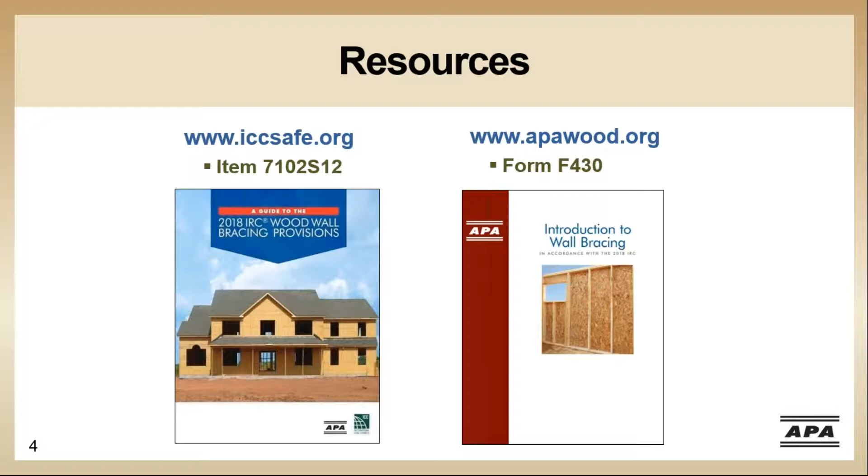During this webinar series, we're working from left to right through the topics shown on these tabs. Last week in our first series, Matt covered the horizontal forces acting on a house and how they are resisted. The code prescribed limitations to prescriptive wall bracing and introduced braced wall lines. Today, we will begin with braced wall panels and go through the steps to determine the required length of bracing. Next week, in part 3, Warren will work through some examples using what we learned in parts 1 and 2, and then review the IRC simplified wall bracing, APA simplified wall bracing, and introduce our wall bracing calculator.

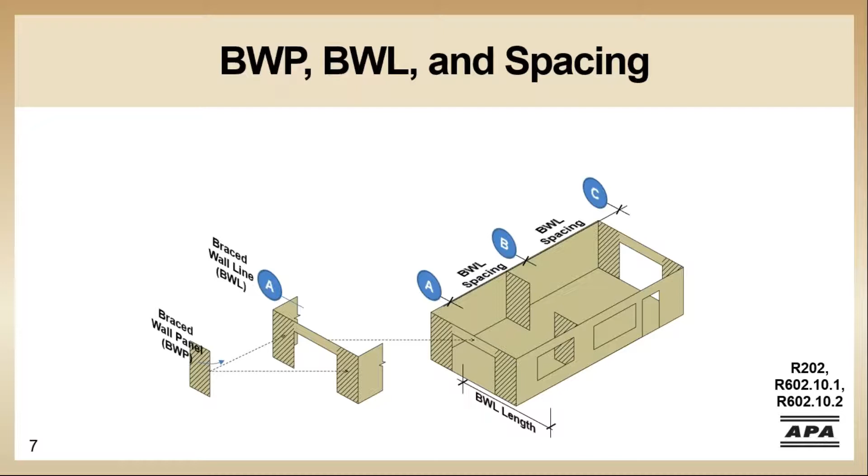The code defines a braced wall panel, or BWP, as a full height section of a braced wall line, or BWL, with no vertical or horizontal offsets. Brace wall panels can be spaced a maximum of 20 feet apart when measured edge to edge. As mentioned earlier, the BWP is the lateral resisting element of a braced wall line. As Matt mentioned last week, the IRC defines a braced wall line as a series of braced wall panels in a single story.

The first one is method LIB, or let-in bracing. It's a diagonal brace that is required to extend from the bottom plate to the top plate. The code defines the rectangular area surrounding the brace as a BWP. The length of this type of BWP depends on the height of the wall and the angle of the brace. Code states that the angle is to be 45 to 60 degrees from horizontal, and the diagonal member can be a 1x4 board or an approved metal strap.

In seismic categories, let-in bracing is permitted in the following cases: the top 2 stories in seismic design categories A, B, and C for 1 and 2 family dwellings, and in townhomes in seismic design category C only on the single story or top level in a 2 or 3 story dwelling. It is not permitted in categories D0 through D2.

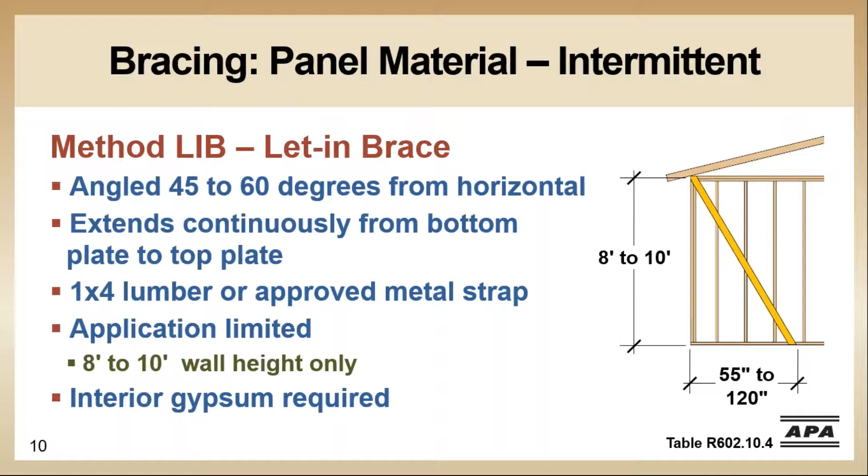Here's an example of method let-in bracing. Code specifies that the diagonal brace must be installed at a 45 to 60 degree angle, and it must be continuous from the bottom plate to the top plate. The interior of the panel has to have gypsum or wood structural panel, which is not shown for clarity. No openings may be cut through the diagonal member, and no openings may interrupt the rectangle made by circumscribing a rectangle around the diagonal brace.

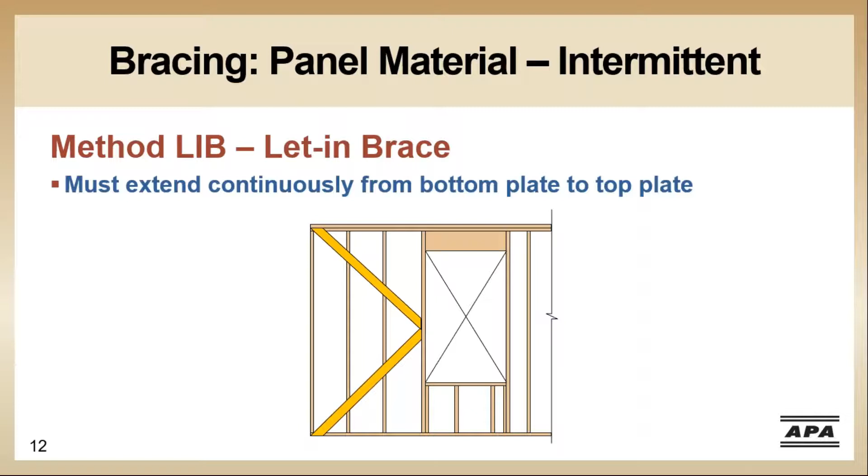For example, the studs at the end of the diagonal brace may not be cut. But potentially a small window fully within the circumscribed rectangle will not interfere with the action of the braced wall panel. Since a diagonal brace is required to be continuous from the bottom plate to the top plate, it cannot be installed as shown here. This type of installation results in a discontinuity.

Method DWB, or diagonal wood boards, is a very strong system. It's even better than wood structural panels, but it is labor and material intensive, and a lot more fasteners are required. This is an example of diagonal wood boards.

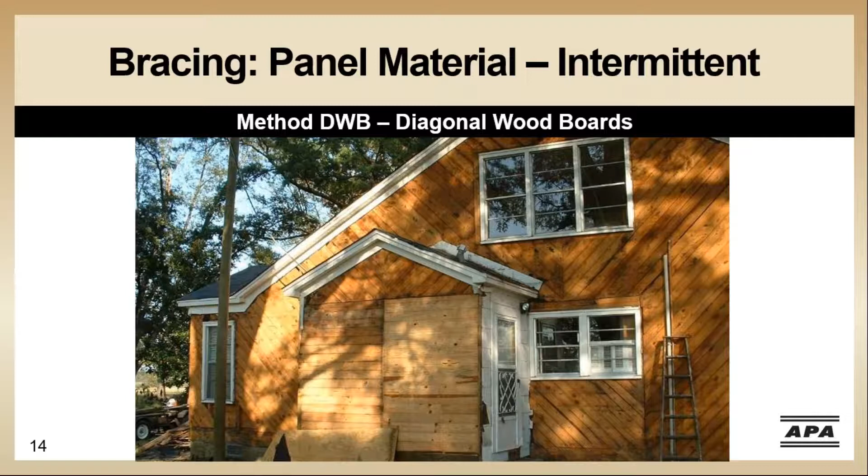These sheathing boards were exposed during a renovation project. If you note on the lower left-hand corner, they shifted to horizontal board sheathing, which is a very poor substitute for bracing because it's only 1/6 as strong. Horizontal sheathing with boards is no longer permitted in the IRC, but there are design values in the American Wood Council's reference SDPWS, or Special Design Provisions for Wind and Seismic.

Method wood structural panel is a wood structural panel that is 48 inches wide. Section R604 gives the definition of a wood structural panel as plywood or OSB conforming to Product Standard 1 or Product Standard 2. Based on wind speed, exposure category, and stud spacing, the minimum thickness may be 7/16 of an inch, and nailing may be an 8-penny minimum.

Blocking is required at all horizontal edges of BWPs. No blocking is required on infill sheathing, which is not considered a BWP. In this picture of tornado damage, you can see that the garage bottom plate is still in place with stud nails sticking up at 16 inches on center. Note the narrow strip of OSB wall sheathing still attached to the bottom plate. Continuity of the wall could have been greatly enhanced had the OSB wall sheathing been better attached to the framing by blocking at the horizontal edges.

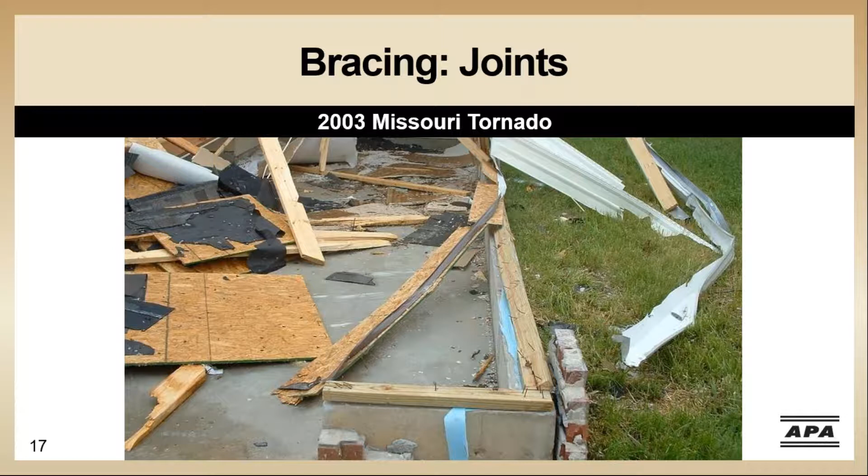Method SFB is structural fiberboard sheathing. Code states that the minimum thickness is 1/2 inch and it must be installed on stud spacing not greater than 16 inches on center. Minimum fastener spacing is 3 inches on center along the edges and 6 inches on center over intermediate supports. The nailing was increased to match other panel type products' shear capacity or lateral resistance.

Here's an example of method SFB, structural fiberboard. The panels are required to be 48 inches in length unless you use the partial credit table in R602.10.5.2.

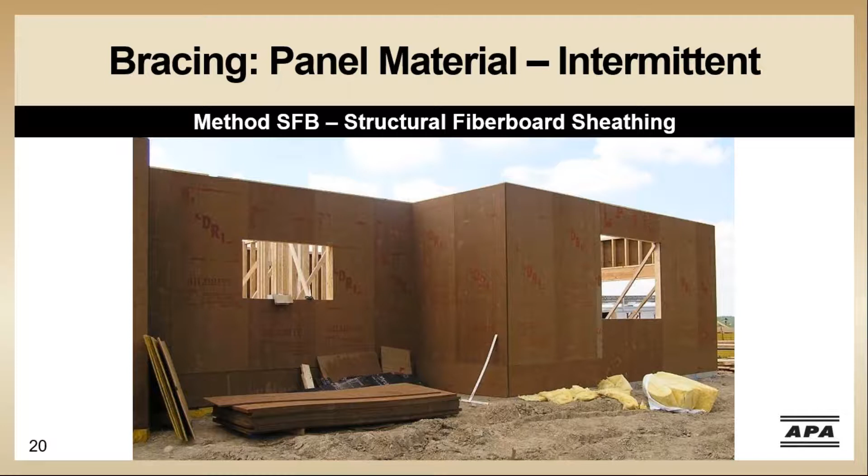Method GB is gypsum board. When gypsum is installed on one side of the wall, the minimum brace wall panel length is 96 inches. If it is installed on both sides of the wall, the minimum length is 48 inches. Minimum thickness is 1/2 inch and maximum stud spacing is 24 inches on center.

Floating corners are not allowed. A floating corner occurs when the edge of the gypsum board is not fully supported by a framing member, like when drywall clips are being used.

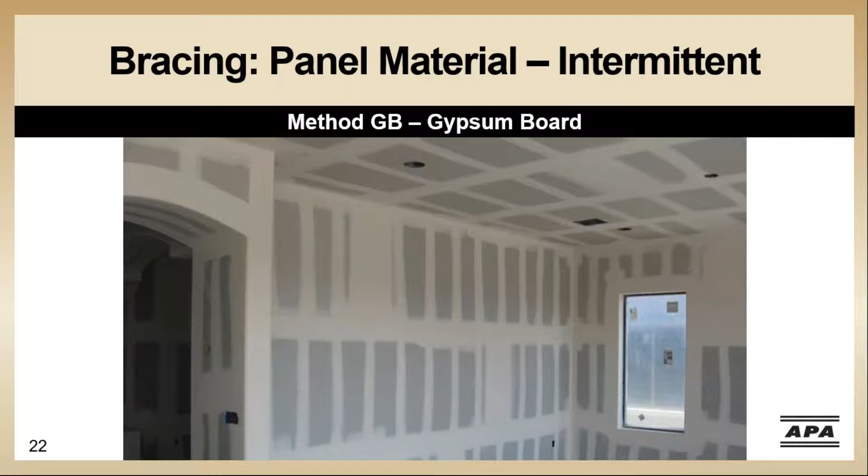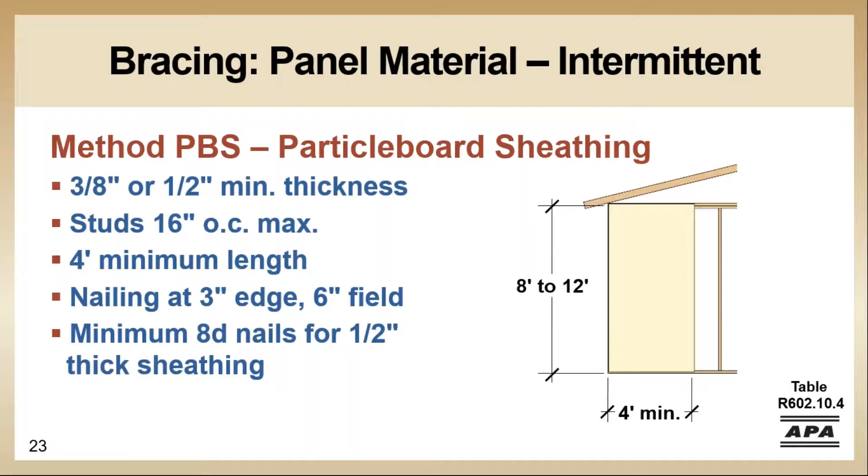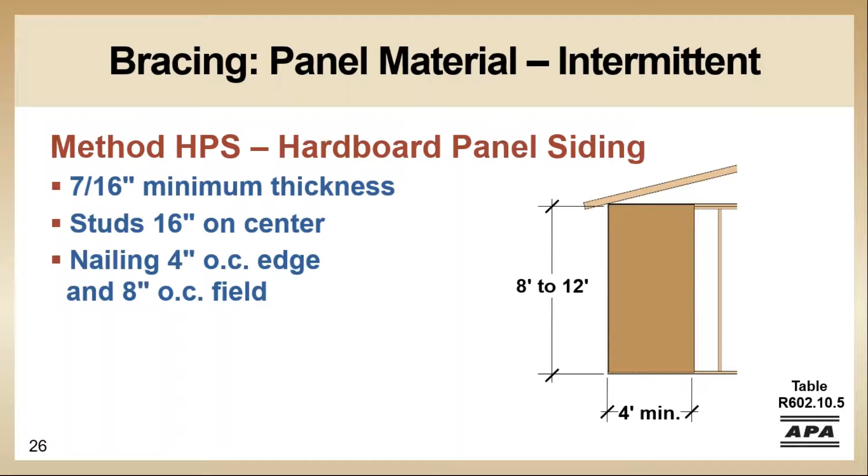This method, HPS, is hardboard panel siding. Fastener spacing is 4 inches on center around the edges and 8 inches on center over the intermediate supports, and the studs are spaced at 16 on center max. The nailing is also increased to match other panel types' shear capacity.

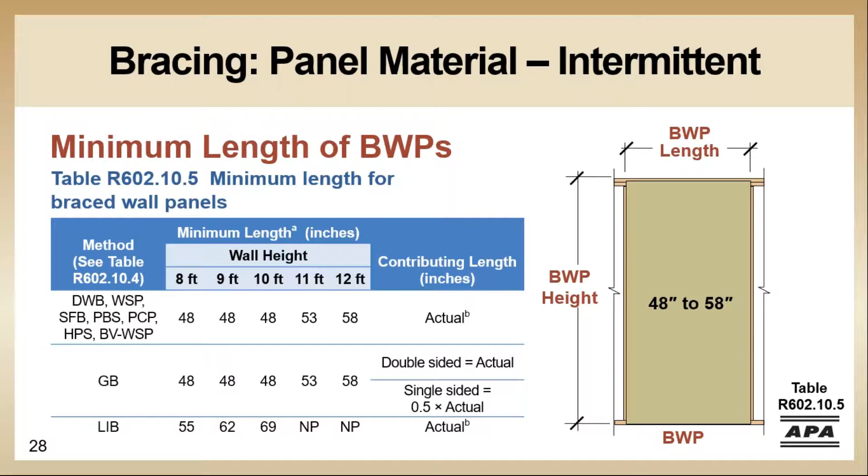BWPs having a length less than 48 inches will now be permitted in intermittent bracing. However, their effective length will be reduced, and it applies to DWB, WSP, SFB, PBS, PCP, and HPS only.

The next 3 intermittent methods can be used when a BWP is less than 48 inches. The first is method ABW, alternate braced wall. This method allows you to have a braced wall panel that is less than 48 inches, but counts 48 inches toward the bracing requirements. They can only be used in 1-story dwellings or the first of 2 stories. This method has been in the code since the 1994 UBC.

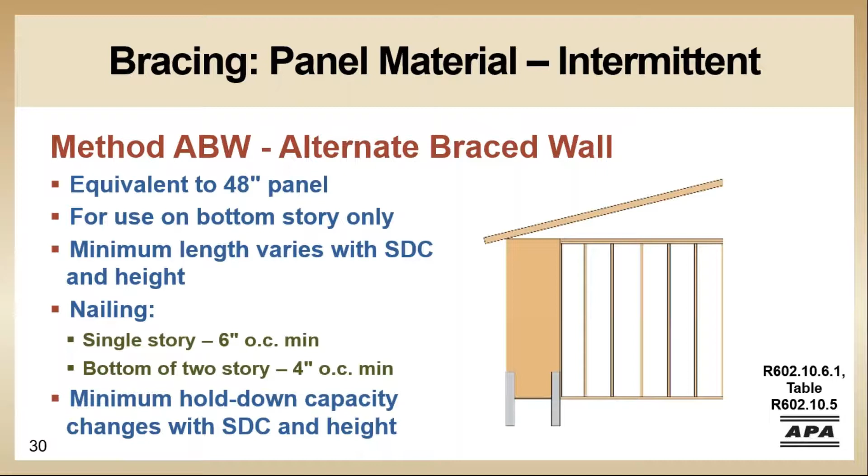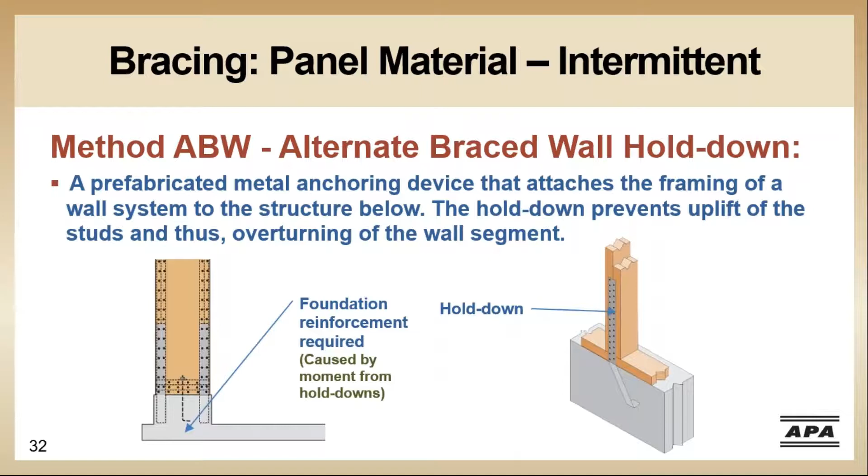ABWs require hold downs. Either the strap type or bolted down hold down are approved for use. Construction of this BWP requires 3/8 inch minimum performance category wood structural panel, which is either plywood or OSB. The capacity of the hold downs are given in IRC table R602.10.6.1. The hold down capacity is a function of the panel length. If the ABW is supporting a story above, it must be nailed at 4 inches on center maximum.

And now we get to portal frames, my favorite subject. Luckily for me, we have an on-demand webinar where the details are covered more in depth. It's Portal Frames Built Right and is available on our website, apawood.org. So I will just be touching on the basics of these methods.

This first method is PFH, or portal frames with hold downs. PFH requires an extended header. This method can be as narrow as 16 inches for a one-story, but must be 24 inches if the BWP supports a story above. Method PFH braced wall panels are permitted to replace each 4 foot of braced wall panels.

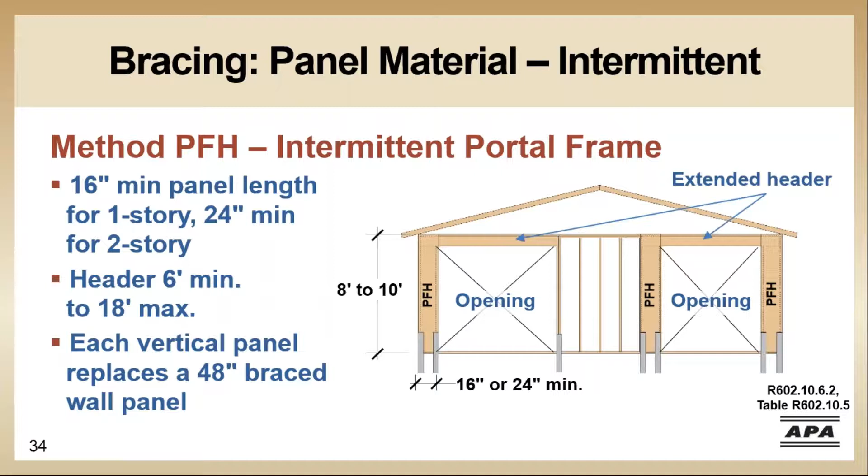PFH must be constructed from plywood or OSB. The required hold down capacity is 3,500 pounds for both the 16-inch and 24-inch construction. The 1,000-pound strap is applied to the opposite side from the sheathing. Notice the extended header and the grid nailing at 3 inches on center. This is a moment resisting connection that allows the BWP to be narrow. The 3-inch on center nailing is required at the double stud on each side and at the bottom plates.

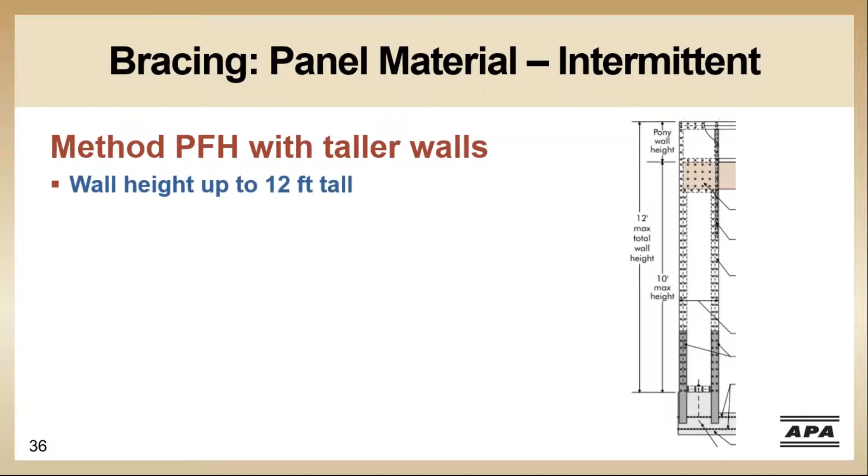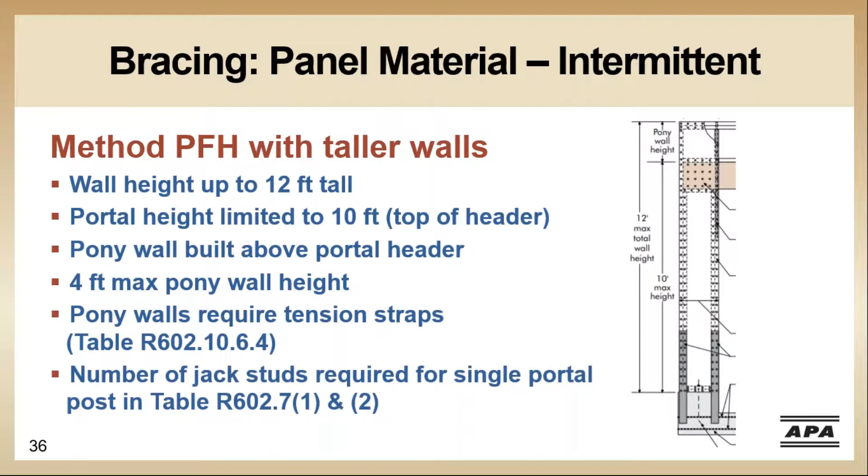In taller walls using PFH, the wall height can be up to 12 feet tall. The portal height is limited to 10 foot to the top of the header. A pony wall can be built above the portal header, but the maximum pony wall height is 4 feet. They also require tension straps per table R602.10.6.4. The number of jack studs required for a single portal post is found in tables R602.7, parentheses 1 and parentheses 2.

PFH can be built as a single portal or a double portal. When built as a double portal, there's a BWP at both ends of the header. In this case, each BWP is equivalent to 4 feet of bracing.

A 1,000-pound strap is required between the jack studs and the header to resist hinging when a load is applied perpendicular to the wall. In the case of a single portal, a 1,000-pound strap is required connecting the foundation and the jack studs supporting the other end of the header.

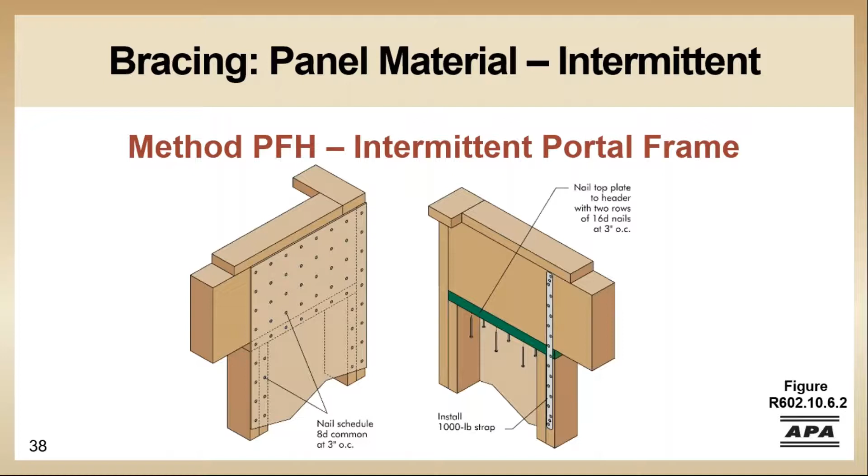Notice the top plate is nailed into the header with 16 penny nails. As mentioned earlier, all these details are covered more in depth in APA's on-demand webinar, Portal Frames Built Right.

The next method is portal frames at garage, or PFG. It also requires an extended header and can be as narrow as 24 inches.

PFG must be constructed from 7/16 inch plywood or OSB. Note the extended header and the grid nailing at 3 inches on center. Also notice the 2 anchor bolts and no hold downs. The 3-inch on center nailing is required at the exterior studs only, and only 1 bottom plate is required.

This portal configuration is worth 1.5 times its actual length. So a 32-inch long portal is equivalent to a 48-inch braced panel.

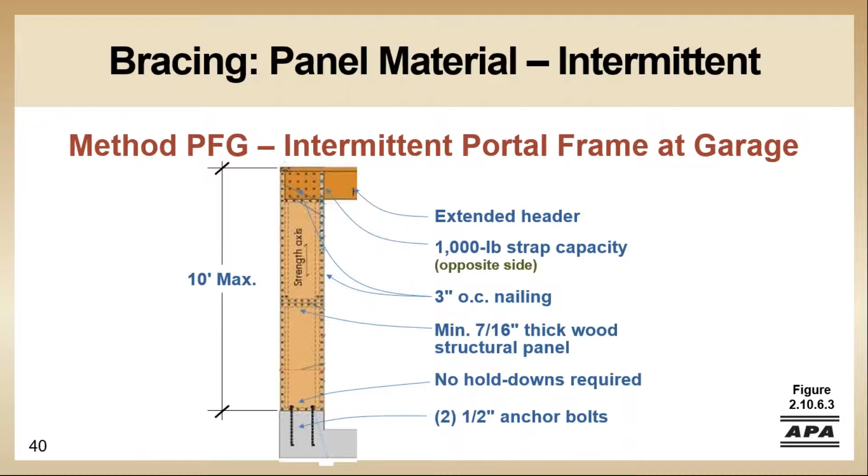Reference table R602.10.6.4 for the required tension strap strength. A 1,000-pound strap works for walls that do not have a pony wall above the opening.

In method PFG with taller walls, wall height can be up to 12 feet. The portal frame height is limited to 10 feet, measured to the top of the header. A pony wall can be built above the portal header, 4 foot being the maximum height allowed.

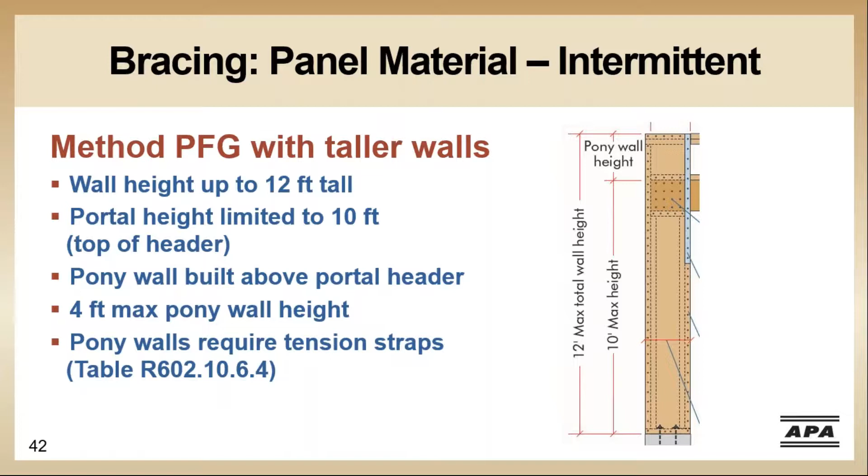They require tension straps per table R602.10.6.4, and the number of jack studs required for a single portal post is specified in table R602.7(1).

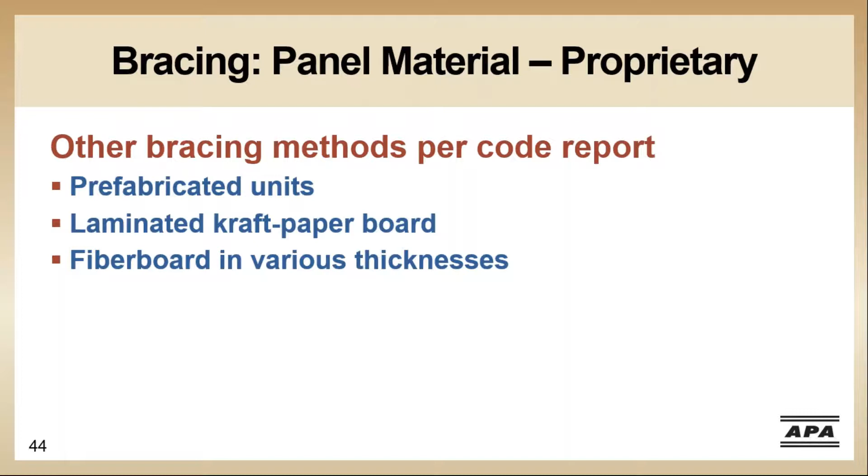Other products can be used as braced wall panels if they have a code report. The code report defines how the product must be installed to qualify as a code-compliant braced wall panel. These are examples of proprietary systems that may be used with the proper documentation and installation.

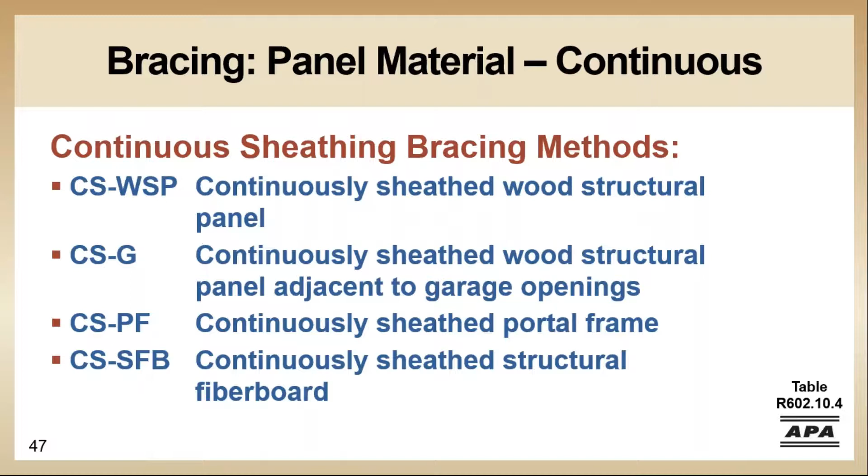Now we'll talk about the 4 continuous sheathing methods. For all 4 methods, the braced wall lines must be fully sheathed, including the gable ends.

Continuous methods allow for narrow BWPs without hold downs and must be fully sheathed with wood structural panels or structural fiberboard sheathing.

The sheathing requirements for continuous methods are: all full height areas are to be sheathed. The areas above and below openings must also be sheathed.

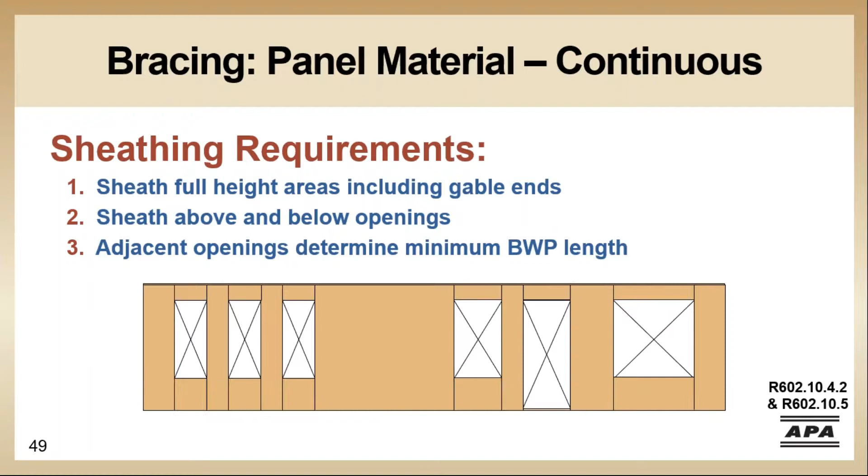Some of the full height areas may qualify as braced wall panels, and the openings in the wall determine how wide the BWPs have to be.

The sheathing above and below openings, and the sheathing that is too narrow to be a BWP, make connections between the BWPs in the wall line. These connections make the wall behave like a long wall line, therefore allowing the BWPs to be narrower than 4 feet. This concept will be explained in the slides that follow.

The opening height is measured from the top of the opening to the bottom of the opening. It is not measured from the top of the opening to the bottom of the wall.

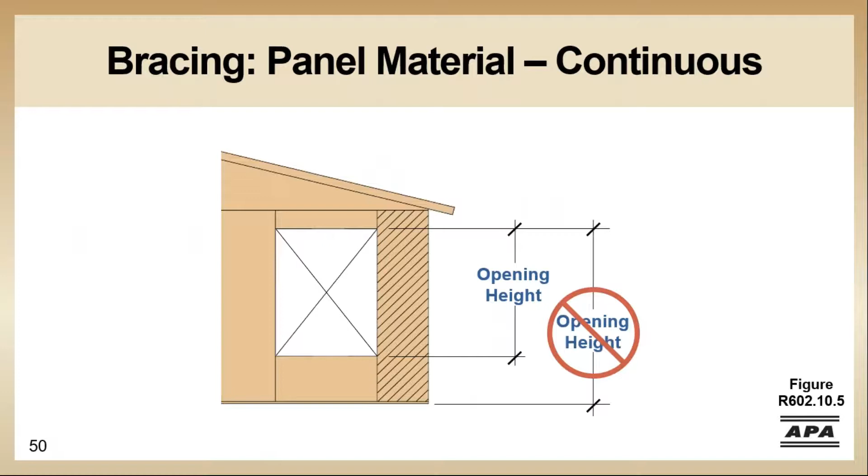Blocking is required at all horizontal edges of BWPs. The infill panels do not need blocking.

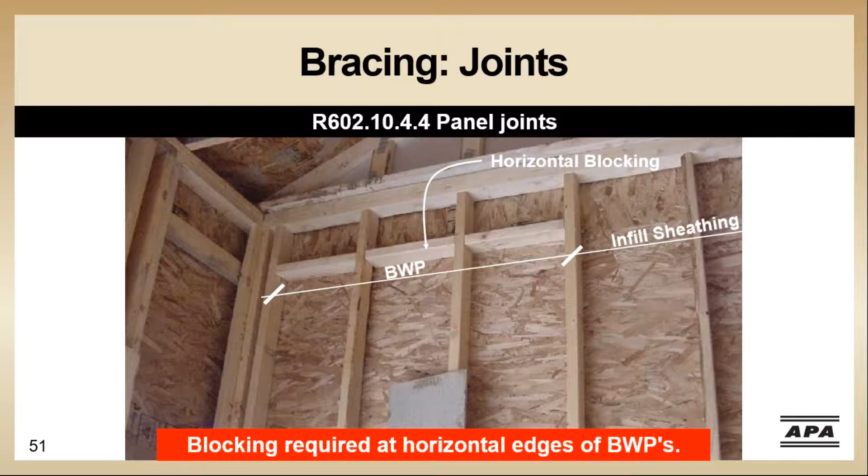For continuous sheathing methods, the entire building must be sheathed, including gable ends. However, not every sheathed area has to meet the length requirement of the BWP.

The wall line only has to have enough BWPs to meet the placement and length requirements of Table R602.10.3, parentheses 1 through 4.

The opening in the wall line determines how wide the BWP has to be. If a section of bracing has openings on either side, the taller opening determines the minimum bracing length.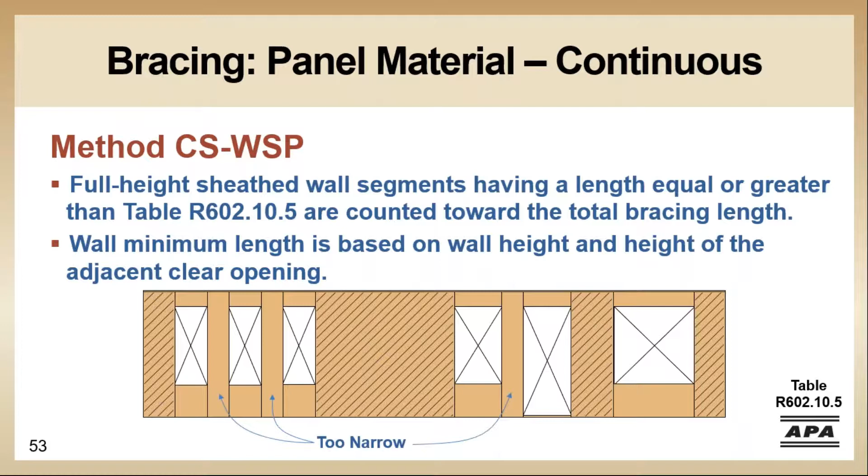Using IRC Table R602-10-5 with the adjacent clear opening height and the wall height, you can determine the minimum length of braced wall panels that can count toward the required bracing.

The table continues with opening heights up to 12 feet, as well as CSG and CSPF, which we'll talk about in a minute. Note that for these two methods, the max header height is 10 feet with a wall height up to 12 feet if a pony wall is used.

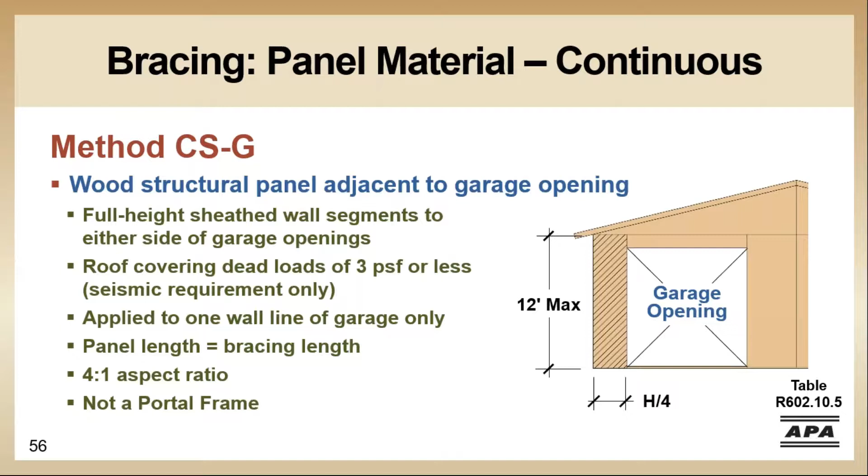This is method CSG, or continuously sheathed garage. It can only be applied to one garage line. It can be applied to both sides of the garage opening, and a wall can have up to 4 openings. This is not a portal frame. It is a regular framed wall with a header. It's a special case of the CSWSP, and it does come with limitations.

For a continuously sheathed home, the walls on either side of garage openings are permitted to have an aspect ratio of 4:1. For an 8-foot wall, the brace may be as narrow as 24 inches. A 9-foot tall garage return wall would have to be at least 27 inches wide.

It is not necessary to have an extended header over these narrow walls beside the garage opening, but a header must be placed next to the panel on jack studs. See footnote C in Table R602-10-4 for more information.

This provision is limited to a single story with a light roof covering for seismic requirements only. In lower seismic regions, there is no roof weight limit, per footnote B in Table R602-10-4. This is because the weight of the roof has no negative impact on wind loads. In fact, the additional weight helps increase the uplift resistance.

What if we have a story above the garage or we have a tile roof? CSPF makes use of the extended header BWP that we discussed earlier, but without hold downs and with continuous sheathing. Furthermore, similar to PFH, CSPF may be used throughout the structure, including on raised floors.

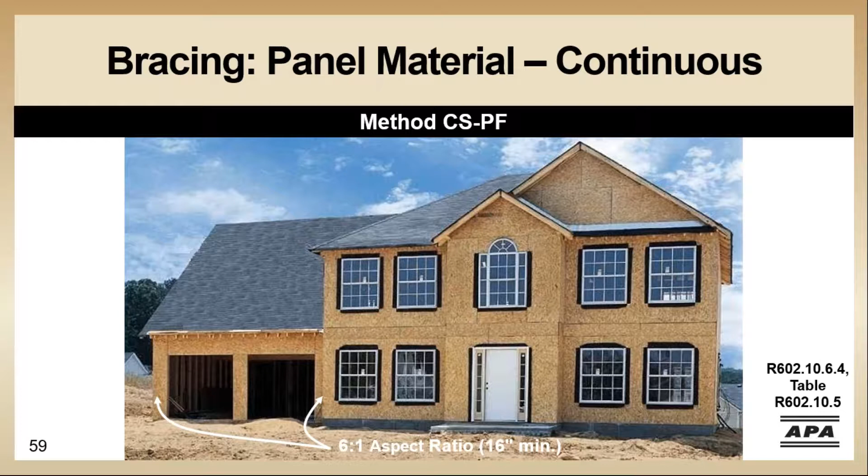And the minimum length of the panel is found in Table R602-10-5. I just want to take a moment here to mention that the panel splice location is one of the most common mistakes I've seen with these type of installations. It's important that it be close to the mid-height of the wall.

Table R602-10-6-4 gives you the required strap capacity based on stud framing, pony wall height, and opening width. When you see DR, it means it's outside the scope of prescriptive design and must be reviewed by a design professional.

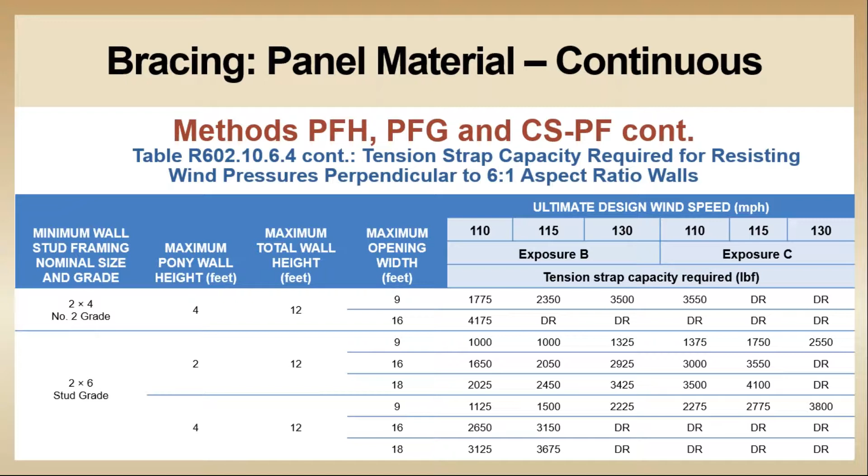The garage on the left could be built using CSG on the front walls that have a 4:1 aspect ratio, or 24 inches for an 8-foot wall height. Again, these BWPs are not permitted to support a story above. If the BWPs have less than a 4:1 aspect ratio, CSPF has to be used.

The tucked-in garage must be built using CSPF because the story above is being supported by the braced wall panels. Note that the wall that has the CSPF in it must meet both the length and placement requirements for that braced wall line.

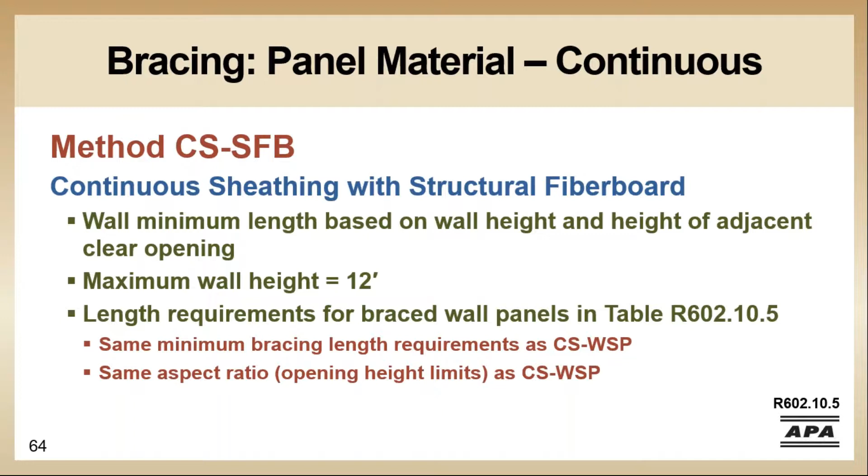The last continuous method is continuously sheathed structural fiberboard. The minimum length requirements are based on opening heights adjacent to the panels and are the same as what we covered for CSWSP. All continuously sheathed braced wall lines must have one of these 5 end conditions shown.

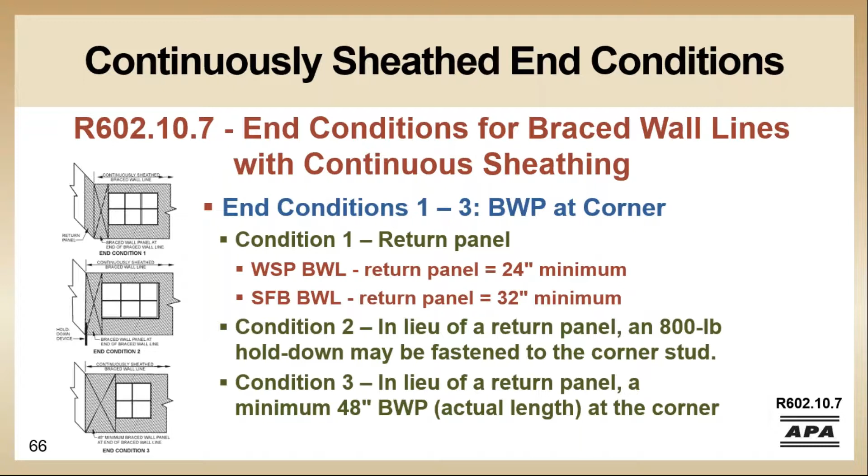For these end conditions, the return panel requirement in condition 1 in a wood structural braced wall line: the return panel must be 24 inches minimum, and in a structural fiberboard braced wall line, the return panel must be 32 inches minimum. In condition 2, in lieu of a return panel, an 800-pound hold down may be fastened at the corner stud. In condition 3, if you have a full-length 48-inch braced wall panel at the corner, no corner return is required.

For condition 4, in the wood structural panel braced wall line, the sheathed corner panel D must be 24 inches minimum, and its return panel must also be 24-inch minimum. For the structural fiberboard braced wall line, the corner panel D must be 32 inches minimum, and its return panel also must be 32 inches.

In condition 5, in lieu of a corner panel, an 800-pound hold down may be fastened to the end of the BWP closest to the corner. Note that these 800-pound hold downs often travel in pairs. If 2 continuously sheathed wall lines meet at a corner and one does not have a panel at the corner, both walls lose the restraint at that corner and each may need an 800-pound hold down.

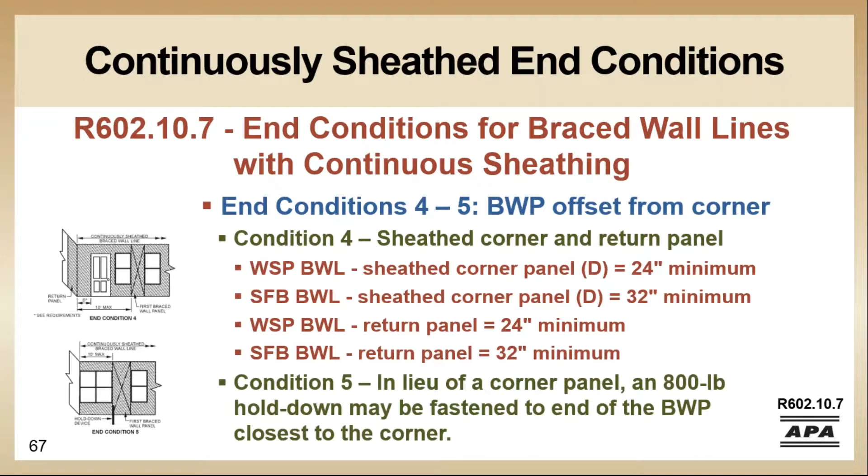Now we are able to mix methods with certain rules. Code permits a variation in bracing methods between stories. The IRC also permits a variation in bracing methods between braced wall lines of the same story. This includes continuous sheathing. This means that the entire structure will not have to be fully sheathed. In the higher seismic design categories, the entire story will have to be fully sheathed, but not the entire structure.

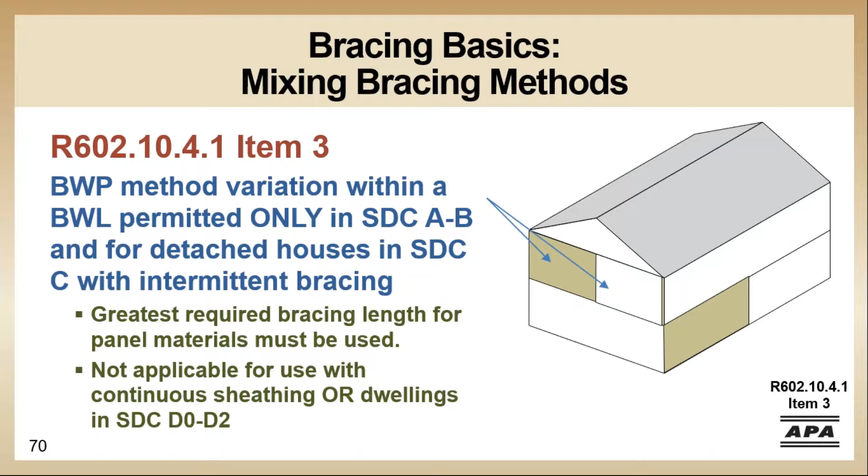In Table R602.10.4.1, Item 3: the braced wall panel method variation within a braced wall line is permitted only in seismic design categories A and B, and for detached homes in category C with intermittent bracing. The greatest required bracing length for panel materials must be used, and it is not applicable for use with continuous sheathing or dwellings in seismic design category D0 through D2.

Item 4 states that mixing CSWSP, CSG, and CSPF along a braced wall line is permitted in any seismic design category.

Item 5 states that the braced wall panel method variation in a braced wall line with continuous sheathing on exterior walls and intermittent on interior walls is permitted only in seismic design categories A and B, and for detached houses in seismic design category C. The greatest required bracing length for all panel materials in a braced wall line must be used. Once again, this is not applicable for dwellings in seismic design categories D0 through 2.

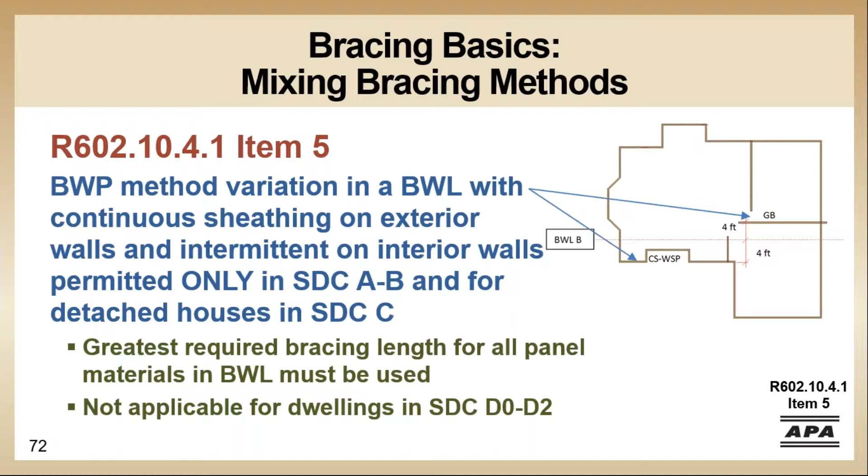For intermittent bracing methods, there are 3 placement requirements that are useful to memorize. The BWP is to begin no more than 10 feet from the end of a braced wall line. The braced wall panels must be located not more than 20 feet on center from edge to edge. A minimum of 2 BWPs per braced wall line when the braced wall line is greater than 16 feet, and a minimum of 1 48-inch braced wall panel or 2 reduced length panels if the braced wall line is less than 16 feet.

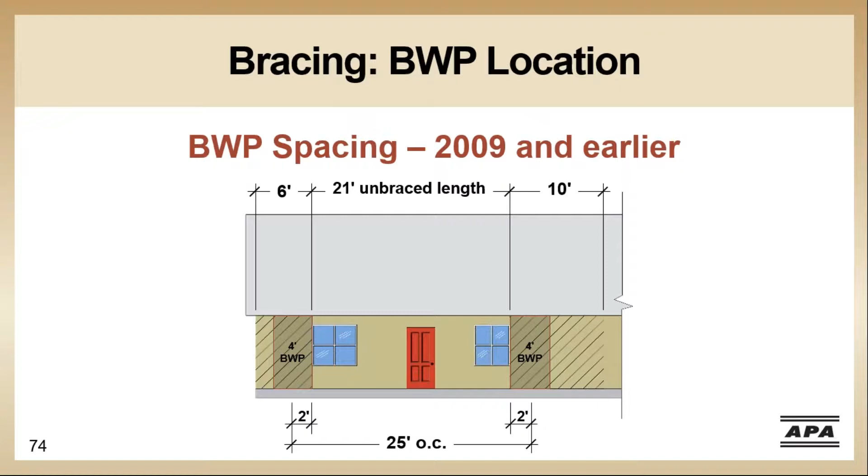Here we have BWPs that are 6 and 10 feet wide. For the 2009 and earlier codes, ICC interpretation measured from the center of an assumed 4-foot BWP, which made the unbraced length 21 feet. The code itself never stated how far into the panel that center measurement was to be done. Therefore, larger panels could require a smaller unbraced distance between them. It didn't make any sense, so with the 2012 IRC, braced wall panels now may be spaced up to 20 feet apart, edge to edge, period. No other measurements are required. The new provision more clearly represents the intent of the code and the principle of spreading out the resistance along the line of force.

BWPs may be located 10 feet away from the end of the braced wall line when using wind requirements only.

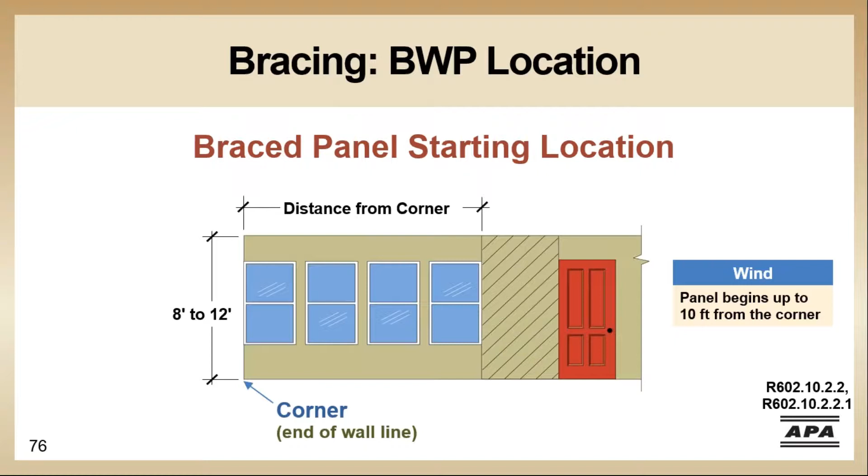And we'll look at one last one. Does this meet the code with an 8-foot high ceiling wall height? The widest BWP spacing is 16 feet. One braced wall panel is 12 feet from the end of the braced wall line, and the braced wall panels meet the minimum width requirement. So no, this one does not meet the requirements because the braced wall panels are more than 10 feet from the end of the wall.

Does this meet the IRC code provision? The widest braced wall panel spacing is 16 feet. One braced wall panel is 12 feet from the end of the braced wall line. The braced wall panels meet the minimum width requirement. Oh, excuse me, so it did not meet the end of the wall.

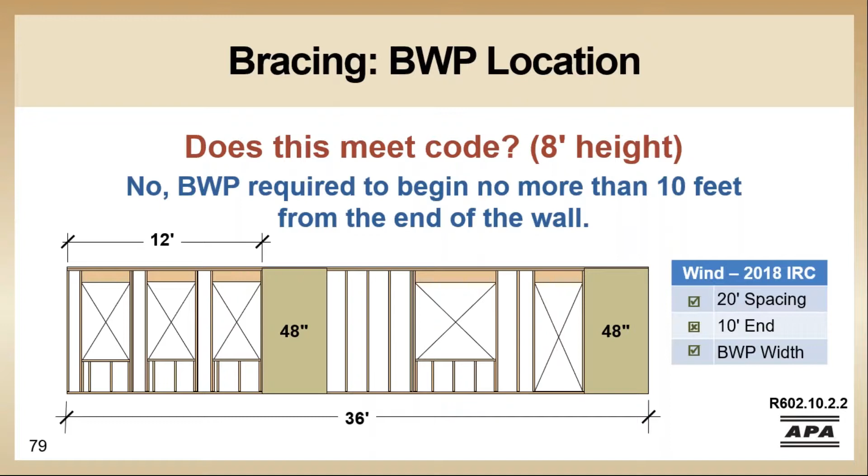Now we get to the last part of the presentation: required lengths of bracing. When determining the required length of bracing, wind speed must be taken into consideration, and depending on the location of the house, seismic risk must also be considered.

We will now go over how to determine the required length for wind and seismic. If you're in an area where seismic considerations must be considered, the required lengths for both wind and seismic must be determined, with the larger length controlling. Other construction details such as hold-downs must be applied regardless of which requirement controls.

There are two bracing length tables, one for wind and one for seismic. The required bracing length is the maximum of the two tables' bracing lengths times all the adjustment factors, which we will go over next.

We'll do wind first. So we determine the required length of bracing by locating the correct row and column using the wind speed, story location, braced wall line spacing, and bracing method.

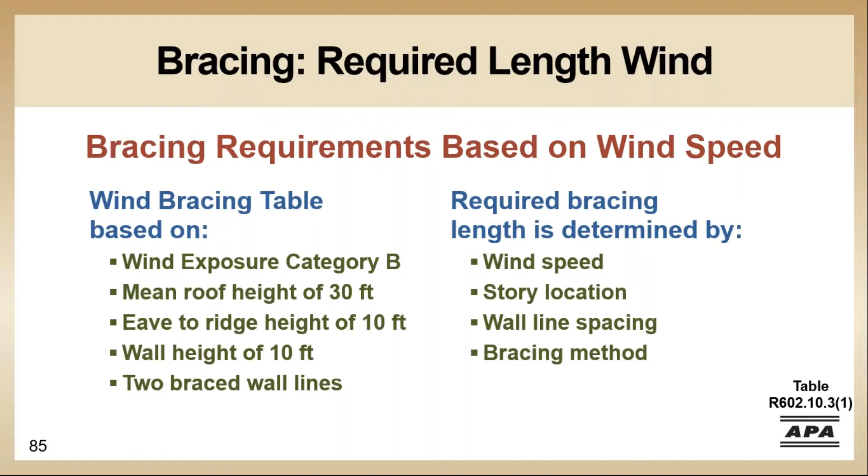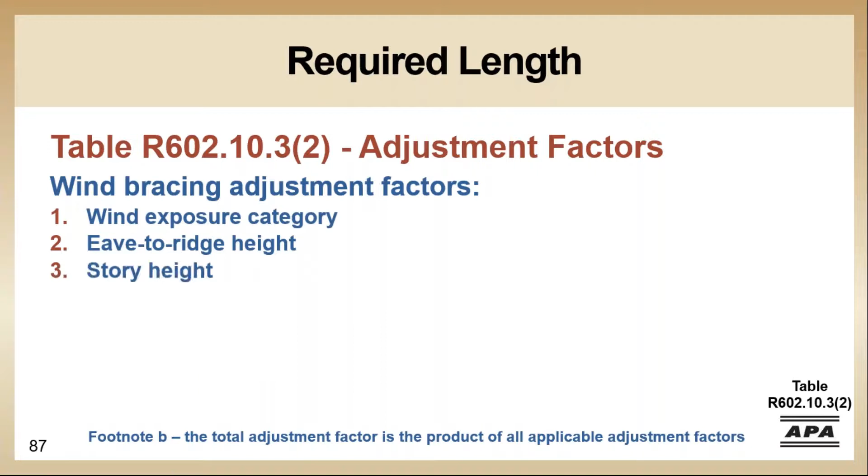The wind bracing adjustment factors are: wind exposure category, eave to ridge height, story height, number of braced wall lines, hold-downs on the top story, interior gypsum board finish, gypsum board fastening, and horizontal blocking. The total adjustment factor is the product of these factors which would apply to the braced wall line.

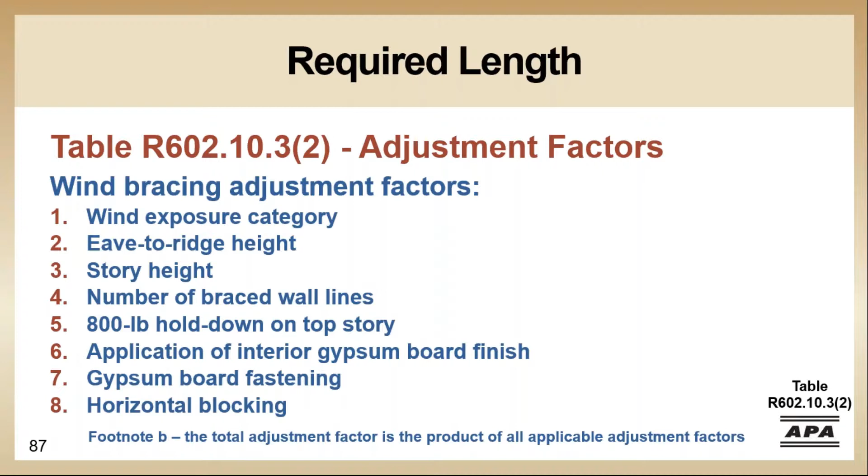The first factor is the exposure category, which Matt covered last week. Note that table R602.10.3(1) is based on exposure category B, so the value here for exposure B is 1.0.

But new to the 2018 IRC, footnote D can change the factor. An example of this is a house on a large body of water. You can't say that the side of the home facing the lake is exposure D and the rest of the home is exposure B and then factor accordingly. Now the entire structure has to be designed as exposure D.

Adjustment factor number 2 is the roof eave to ridge height. When wind blows on a house, the larger the area, the greater the load, like a sail on a boat. The factors go up as the eave to ridge height increases.

If you're wondering why the factors are higher or lower for less than 10 feet on single story versus multi-story, it's because the roof eave to ridge height is a larger percentage of the total area of the house when it's a single story. If you compared the effects of increasing the eave to ridge height from 10 feet to 15 feet on a single story house versus a 3-story house, the percentage of area increased is much greater on the single story.

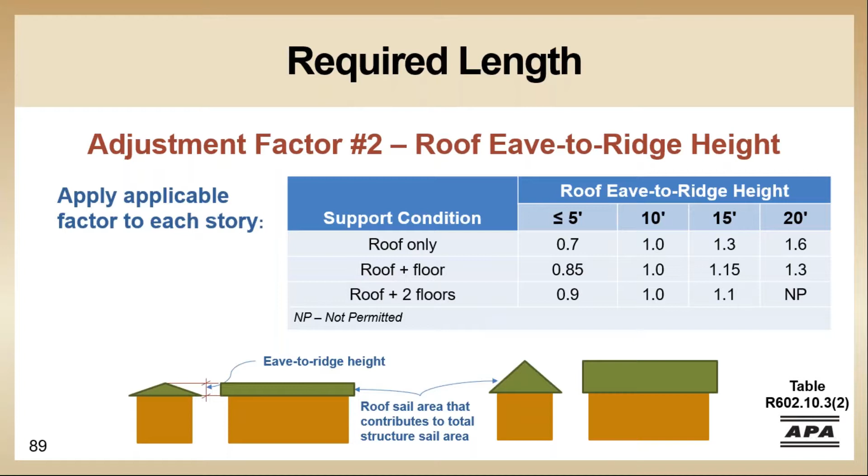Adjustment factor 3 is story height. Table R602.10.3(1) is based on a 10-foot story height, so the adjustment for 10 feet here is 1.0. The 12-foot story height is just for linear interpolation purposes only, since the story height is limited to 11 foot 7 inches.

The 2018 IRC changed terminology from wall height to story height in table R602.10.3(2), but not in (1). That causes a conflict. Story height is defined in section R202 as top of floor to top of floor. Wall height is not defined.

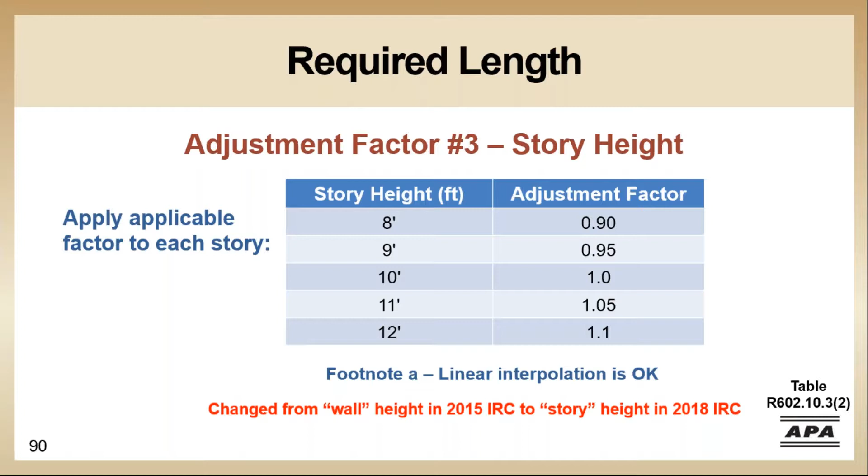Adjustment factor number 4, table R602.10.3(1), is based on 2 braced wall lines, so the adjustment for 2 braced wall lines is 1.0. Note that this applies to each direction at each story. Adjustments are based on the reduced braced wall line spacing resulting from the use of interior braced wall lines.

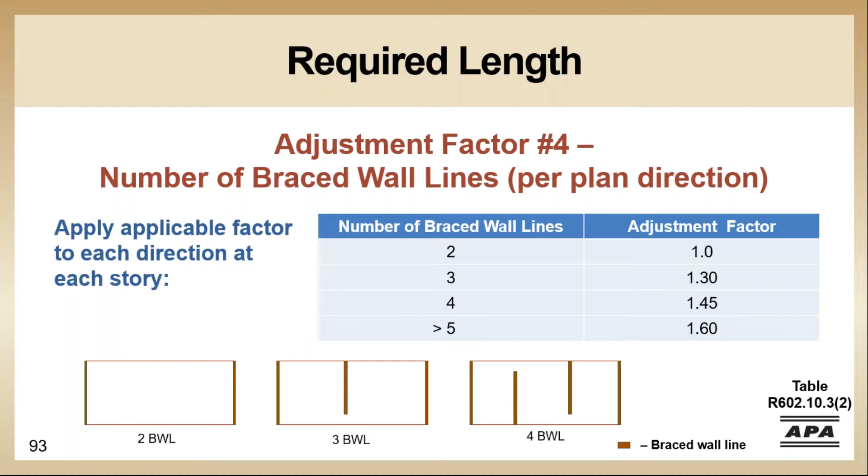Adding more braced wall lines will result in less space between the braced wall lines, which will require less bracing, but then this adjustment factor must be applied. The adjustment is for all parallel lines, not just the interior lines. On occasion, an exterior wall line will require two separate braced wall lines.

Adjustment factor number 5 is applicable with these methods to the top story only, because it does not have the mass of stories above it to help resist the overturning forces due to wind. They're installed at both ends of each braced wall panel, and a continuous load path to the foundation is required.

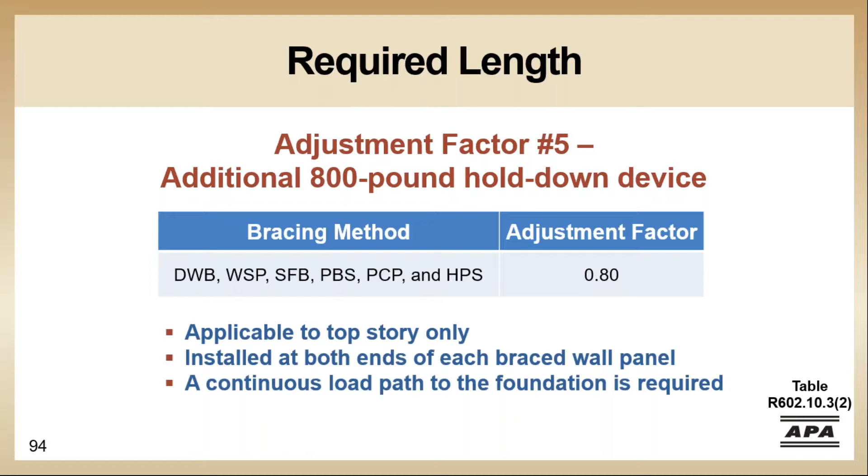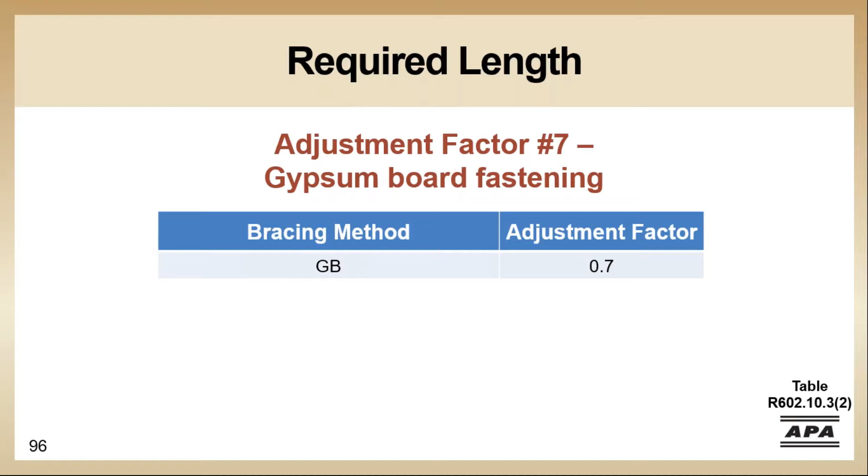Adjustment factor number 7 covers gypsum board fastening. This factor is applicable when panels are fastened at 4 inches on center at the perimeter and all horizontal joints are blocked. We noted earlier that minimum fastener spacing is 7 inches on center with methods GB, so this adjustment credits the use of more fasteners. This only applies to perimeter fasteners; fasteners in the field can remain at 7 inches on center.

Adjustment factor number 8 is a big one in my opinion, in that if horizontal blocking is omitted, you need twice the number of braced wall panels. But this can work on some garages and sidewalls without affecting your design much.

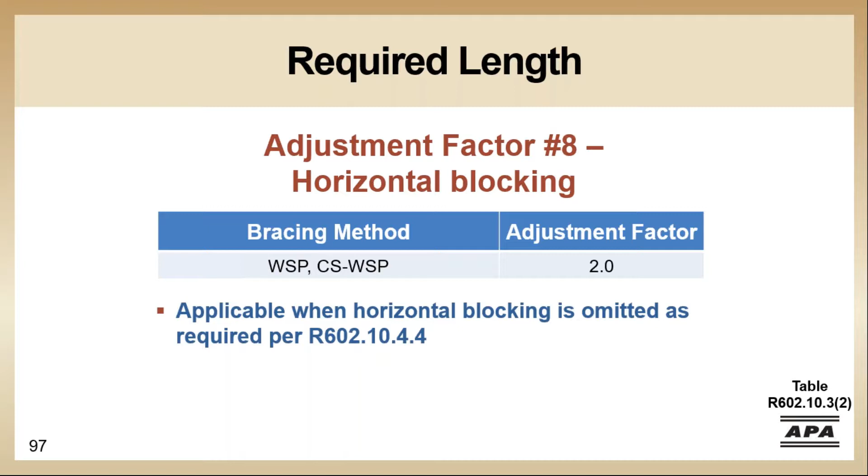In the 2015 IRC, braced wall line spacing only applies to some of the methods, but now in the 2018 IRC, braced wall line spacing requirements apply to all methods.

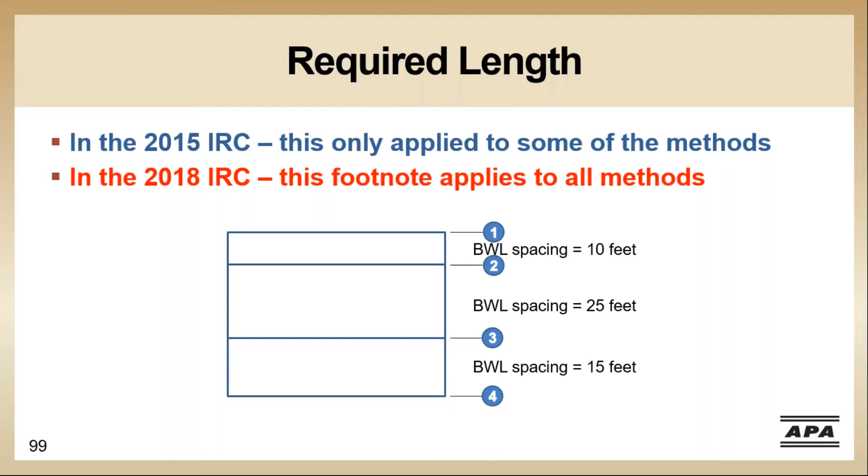In this example, the braced wall line spacing for line 1 is 10 feet. For braced wall line 2, the spacing is the average distance between lines 1 and 3, which is 17.5 feet. For braced wall line 3, spacing is the average between lines 2 and 4, which equals 20 feet. And braced wall line 4 spacing is 15 feet.

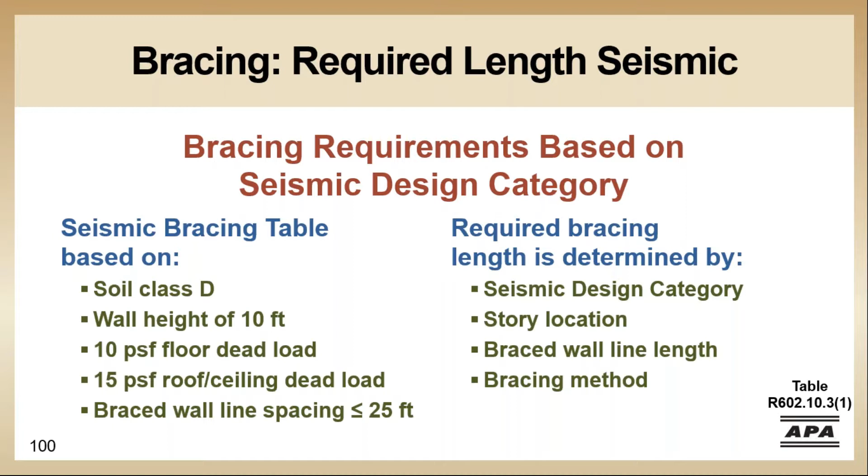So now let's look at the seismic bracing requirements. If the structure is a detached 1 or 2 family dwelling in seismic design category D or greater, or townhomes in seismic design category C or greater, you must also consider the seismic bracing length requirements. You then compare the required length from the wind tables, and the longer length will control.

Determine the required length of bracing by locating the correct row and column using the seismic design category, story location, braced wall line length, and bracing method. One difference you'll notice is you enter the table with the braced wall line length instead of the braced wall line spacing.

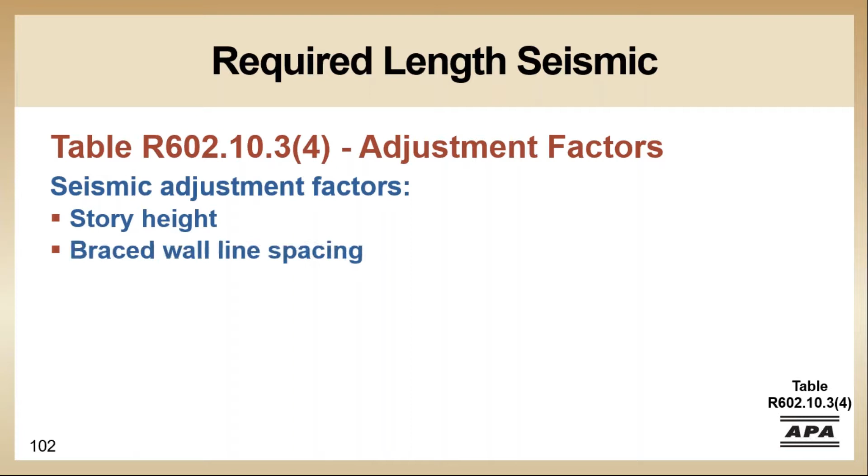As with wind, after you determine the required length of bracing, the next step is to apply the adjustment factors, which are story height, braced wall line spacing, wall dead load, roof ceiling dead loads, walls with stone or masonry veneer, interior gypsum board finish, and horizontal blocking. So all these adjustment factors apply to your seismic designs.

If your story height is 10 feet or less, no adjustment is needed. Over 10 feet, you must multiply by 1.2.

If you're looking at a townhouse in category C and the braced wall line spacing is less than or equal to 35 feet, no adjustment is required. If the braced wall line spacing is greater than 35 feet up to 50 feet, the adjustment factor is 1.43. Remember, if you're in category C, detached 1 and 2 family dwellings are exempt from seismic requirements.

In category D, these adjustment factors apply to both townhomes and single and 2 family dwellings. Braced wall line spacing less than 25 feet requires no adjustments. Over 25 feet but less than or equal to 30 feet is multiplied by 1.2. Over 30 feet but less than or equal to 35 feet is multiplied by 1.4.

The next adjustment factor is the wall dead load. As Matt covered in the first webinar, the seismic load is determined by the mass of the structure. If the wall dead load is between 8 and 15 psf, no adjustment is needed. If the wall dead load is less than 8 pounds per square foot, you're able to take a reduction and can multiply the required length by 0.85.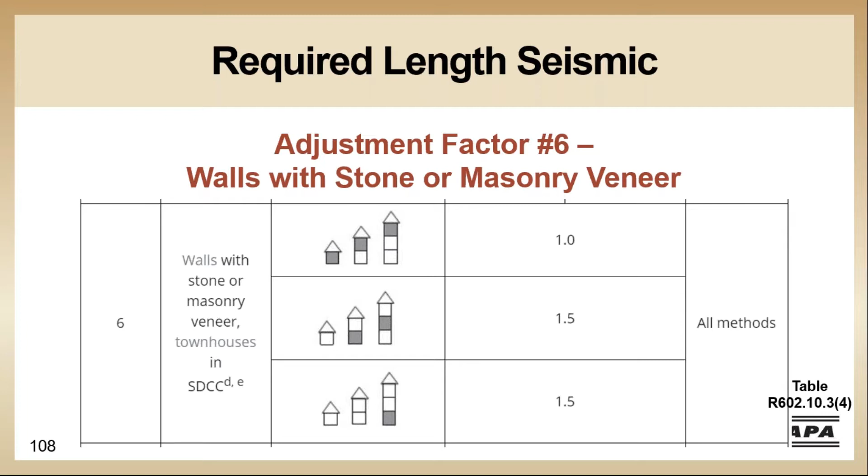Now we'll get into the adjustment factor for method BVWSP, which is wood structural panels with a stone or masonry veneer. This applies to detached 1 and 2 family dwellings in categories D0, 1, and 2. For details on this method, we're referred to Table R602.10.6.5. Note that townhomes with stone or masonry veneers in category D0 through 2 should have their wall bracing designed by an engineer.

Figure R602.10.6.5 gives further detail on how to properly construct the BVWSP method. As you can see, it's complicated. This factor alone is why I'm so thankful I don't have to deal with seismic designs in my territory.

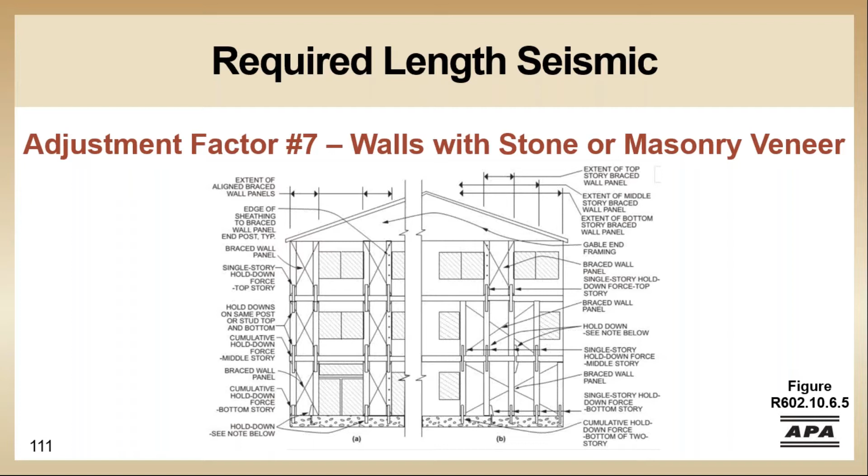The next adjustment factor applies to method WSP and CSWSP used for single family or 2 family dwellings in categories D0 through D2. If you're using these methods and have stone or masonry veneer on the first or second story of a 2-story dwelling, the required length should be multiplied by 1.2.

The last adjustment factor applies to both methods WSP and CSWSP. As with wind factors, if you choose not to block the horizontal joints, you will need to provide twice as much bracing.

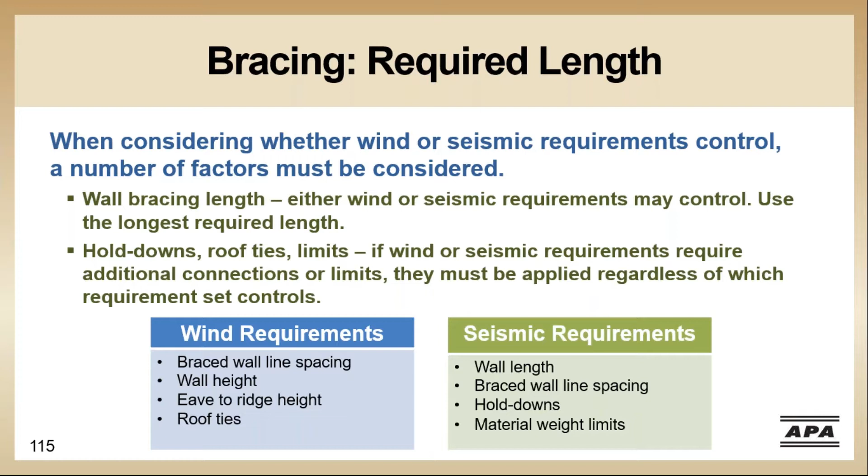If you do happen to be in a higher seismic area, you must calculate the required length for both wind and seismic and adjust that length with the appropriate adjustment factors. After this is completed, you compare the lengths required and the longer length will control. I find this decision tree helpful to think through the process.

Let's take a quick look at an example. The wind table applies to all structures while the seismic table has subcategories that determine how it is applied.

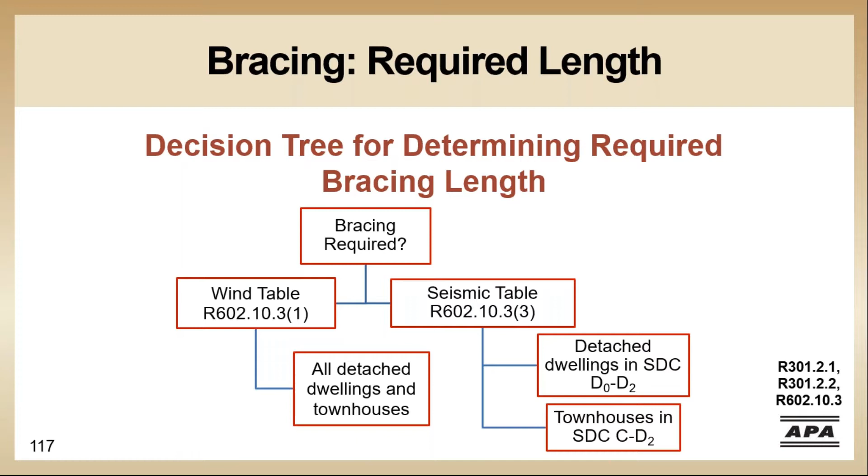First, we go to the wind table. We will assume 110 mile per hour ultimate wind speed, the bottom of a two-story structure, and the CSWSP method. Our braced wall line spacing was 25 feet, so we'll round up to 30, which is conservative. If we aren't able to meet the requirements, we can always come back and interpolate.

The required length of bracing using method CSWSP for the bottom of a two-story structure in a 110 mile per hour ultimate wind region is 8 feet.

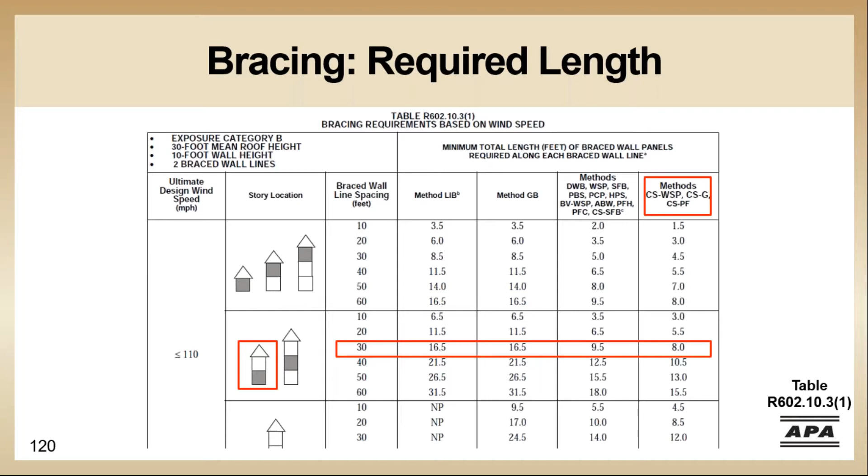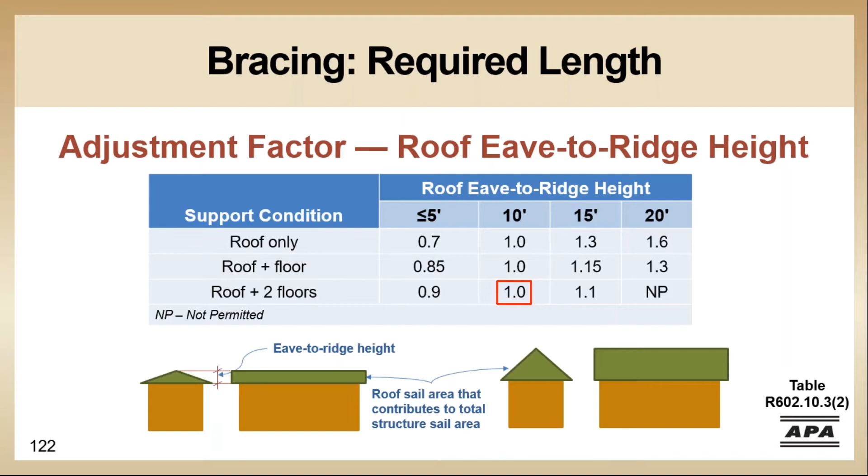In our example, the exposure category is B, so no adjustment is needed. Our example has an eave to ridge height of 10 feet, so again, no adjustment needed. We're able to take a small reduction due to having a 9-foot story height; we can adjust the required bracing by 0.95. We have two braced wall lines, so again, no adjustment is needed.

Now we take all these adjustments and apply them to the 8-foot the table told us we needed. Exposure adjustment is 1, eave to ridge height adjustment is 1, wall height adjustment is 0.95, braced wall line adjustment is 1. After multiplying all these adjustments, we need 7.6 feet of bracing for wind requirements.

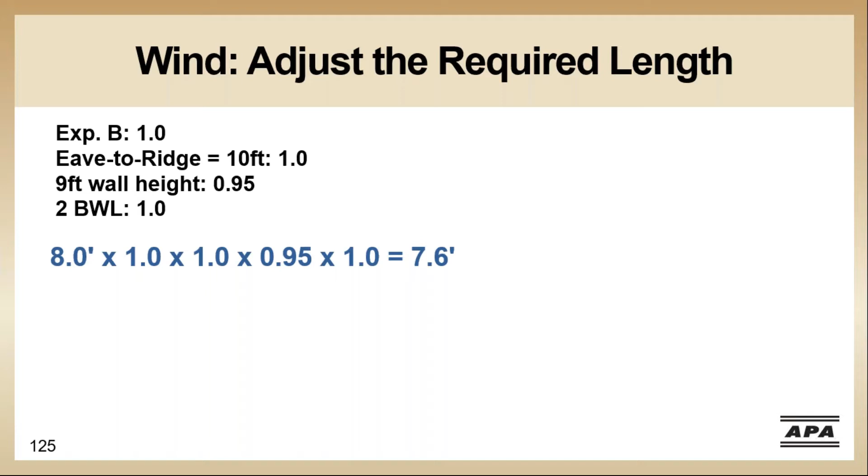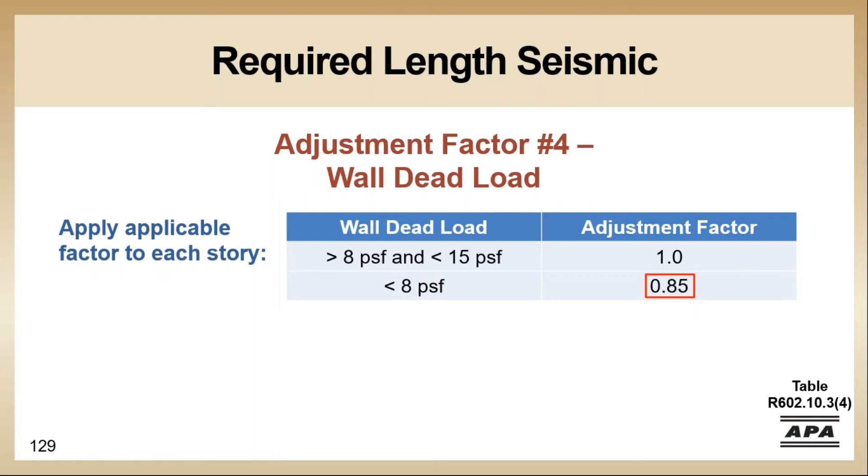So now let's check the same wall for seismic. We'll start by getting the adjustment factors. Our story height is 9 feet, so no adjustment needed. We're right at the limit for spacing, so luckily we can ignore this one as well. 7 pounds per square foot for the wall dead load gives us a 0.85 adjustment. And the bottom of 2 stories with the roof ceiling dead load of 15 pounds per square feet is a factor of 1.

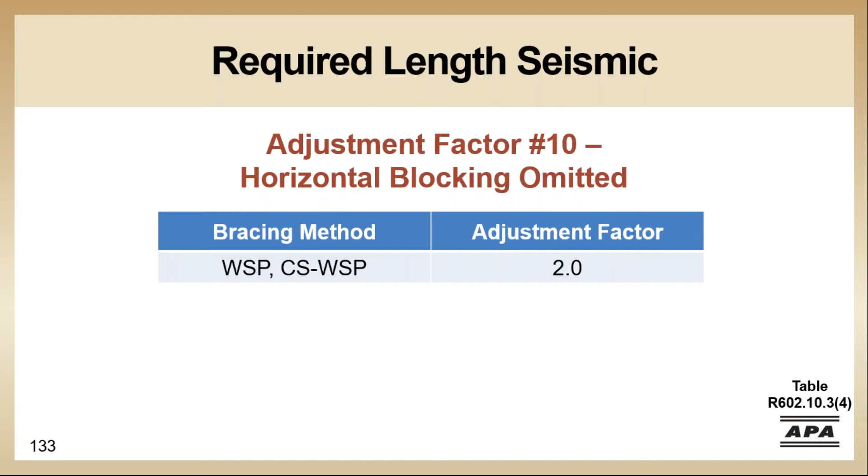Thankfully, we get to ignore our masonry and stone veneer. So we're going to assume the walls have gypsum, and we can ignore this factor. And all BWPs are blocked, so we will ignore this one as well. Since our brace wall line length is 40 feet and we're using CSWSP, the required length of bracing for the bottom story of a 2-story structure in seismic design category D0 is 12.8 feet.

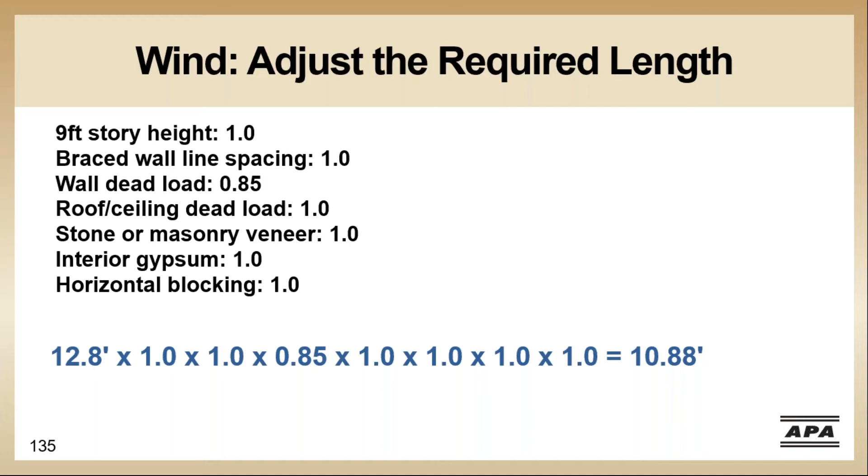Now we take all the adjustments and apply them to the 12.8 feet the table told us we needed. The dead load adjustment is 0.85 and all the other adjustments are 1.0. So after multiplying all the adjustments, we need 10.88 feet of bracing, which we'll round up to 10.9 feet. So we've checked both wind and seismic, and now we need 10.9 feet of brace wall panels required for the seismic.

We determined the minimum lengths that will count. This is going to be a function of the adjacent openings. In our case, we're planning to use CSPF on both sides of the garage. So those piers must be a minimum of 18 inches. We have a door opening of 92 inches, which the adjacent piers must have a minimum length of 37 inches. Our window opening is equal to or less than 64 inches, so we need a minimum of 27 inches next to the window.

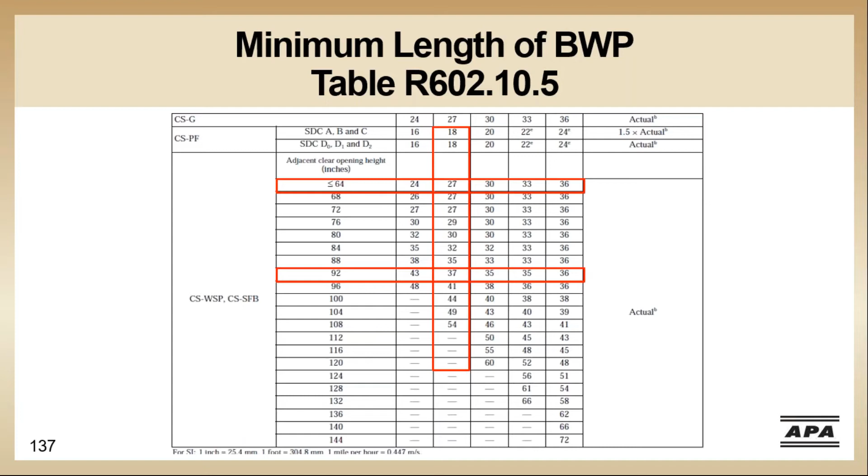So this concludes today's presentation, and I will turn the mic back over to Mary.